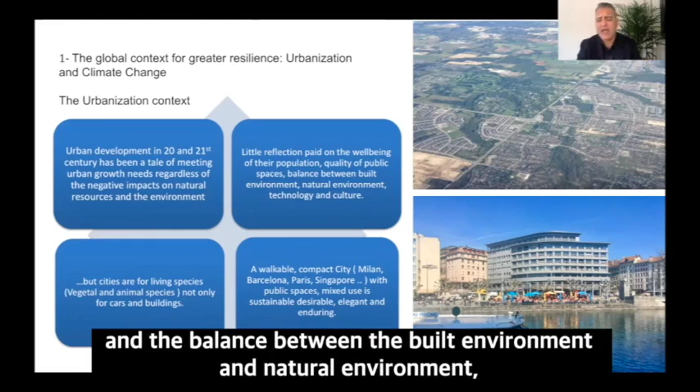There has been little reflection paid on the well-being of the population, quality of urban space, which is public spaces, and the balance between the built environment and natural environment, between the implementation of new technologies and culture, and all those elements that come together in urban life. But there's also an understanding increasingly that cities are for vegetal and animal species, for living species, including human beings, not only for cars and buildings and the built environment.

What we see increasingly labeled as desirable by the population is a walkable city. We have those compact walkable cities in Europe, but also elsewhere in Asia. Milan, Barcelona, Paris, to some degree Singapore are very good examples of those cities where people can move around, can use public spaces, where there is urban mixity, mixed use between retail, housing, and business, that makes cities obviously more sustainable, desirable, elegant, and enduring, with an environment that is prone for human and living species development.

The second part of this context is obviously climate change. There is an overwhelming consensus that climate change is a reality across the planet. All cities are impacted by climate change. And if we really want to open up climate change in terms of its impact, it's extreme weather events. So it's flooding, drought, heat and cold wave periods, hurricanes, tornadoes, typhoons in greater frequency, irregular in terms of their seasonality, and increasing in both intensity and frequency, obviously as a result of climate change.

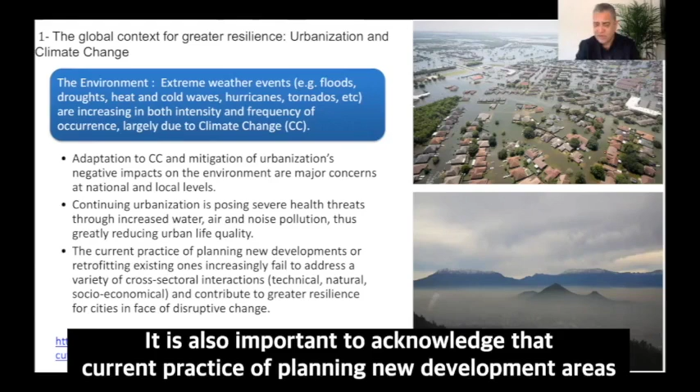It is also important to acknowledge that the current practice of planning, be it for new developments, new developed areas, or retrofitting the existing ones, has been increasingly failing to address a great number of cross-sectoral interactions that need to be addressed to reduce these externalities, to improve the living environment for the population, and to develop greater resilience.

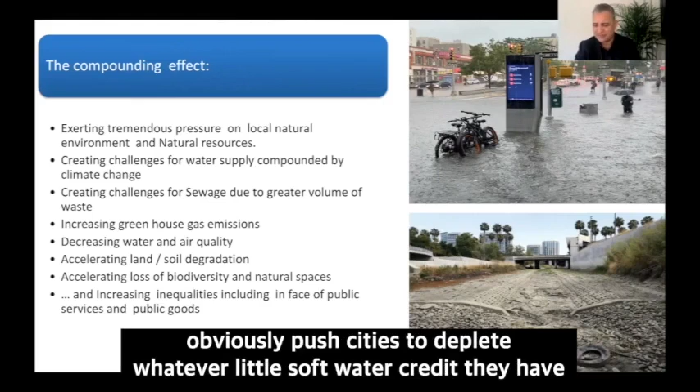The compounding effect of urbanization and climate change cannot be more staggering. Obviously, we have tremendous pressure on local natural environment and natural resources. The lower picture shows you an episode of drought, where extensive droughts across different parts of the world obviously push cities to deplete whatever little soft water credit they have at their disposal. And this obviously puts a huge pressure on the renewal of these resources.

The compounding element is that climate change and urbanization are obviously affecting the water supply, as well as other natural resources that also participate in the food system. Soil, for example, is a very good illustration of how our most fundamental element for our survival, which is water, but also the food system, can be negatively impacted by the compounding effect of urbanization and climate change.

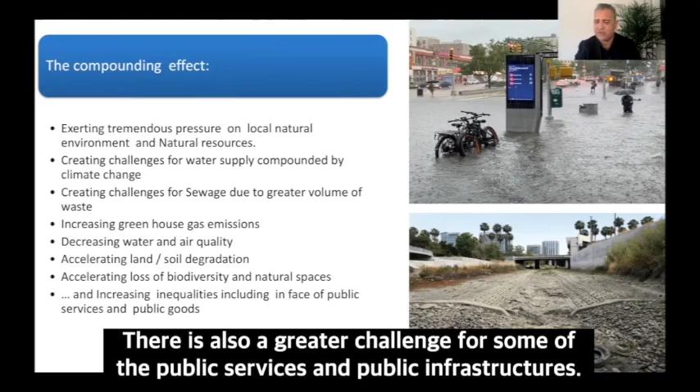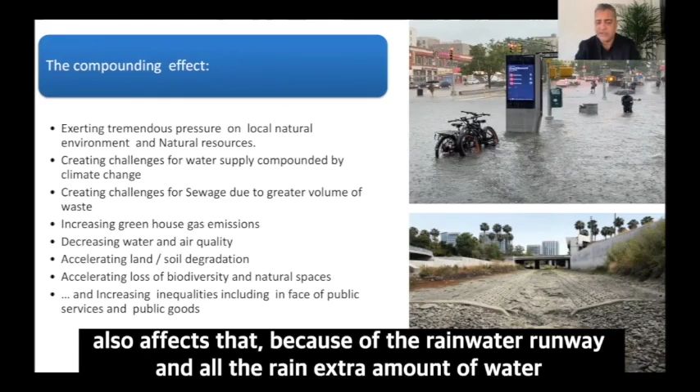There are also greater challenges for some of the public services and public infrastructures. Water and waste treatment, the sewage system are heavily challenged due to greater volume of waste and irregularity of waste. And some of the heavy rains, unseasonal rains that our cities have been witnessing also affect that because of the rainwater runoff and all the extra amount of water that needs to be processed and overwhelms the treatment facilities.

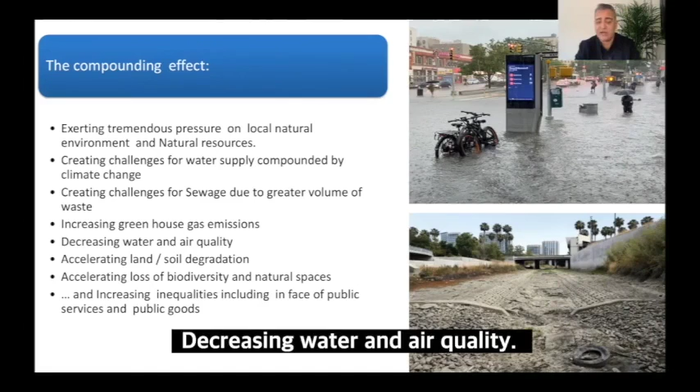Greater increase in greenhouse emissions is also part of that vicious circle or compounding effect of urbanization, which is accompanied by a greater number of cars and transportation based on fossil fuel, and therefore greater greenhouse gas emissions. Decreasing water and air quality. It's not only about quantity, quality is also very important as a result of this convergence of urbanization and climate change.

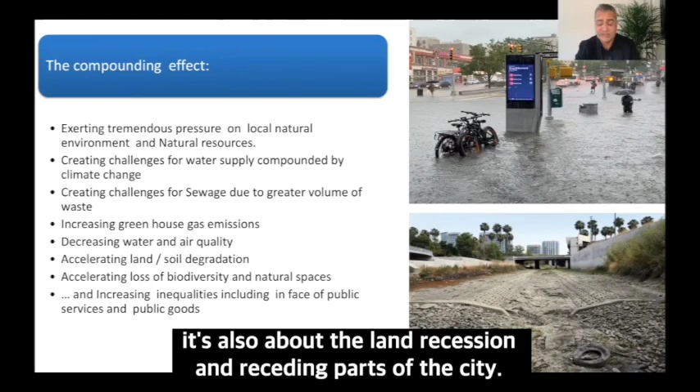As well as I was saying earlier, acceleration of land and soil degradation, which clearly affects the livelihood of people through the food system, but not only, it's also about the land recession and receding parts of the cities. You see these big holes that open up, and this is because of the soil degradation also.

There's also obviously acceleration of biodiversity loss. The more we build, the more we concrete, the more we use asphalt, we push natural species, vegetal and animal, further outside the cities, and biodiversity loss has reached unparalleled levels across cities in the world, and also the natural spaces that go hand in hand with the biodiversity loss.

And obviously, as a result of all this, we also have the social dimension, which is greater inequalities in face of public services and public goods that are more and more needed. It's not only about the supply of water and electricity, it's about all the elements that we as one single community, urban community, need to have equal access to.

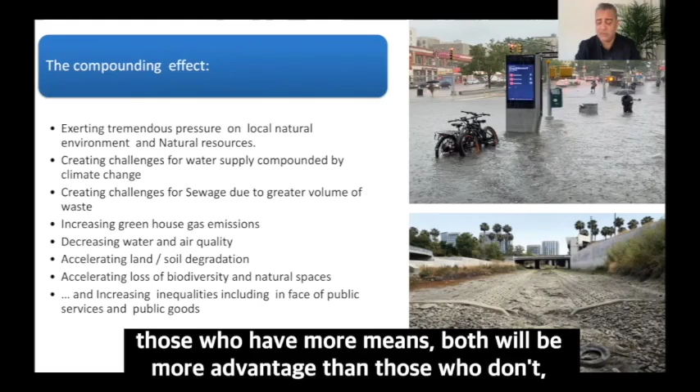Well, in times of scarcity, those who have more means will be more advantaged than those who don't, especially in situations where elements of public good and state interventions are less abundant. This brings us to what I wanted to show you.

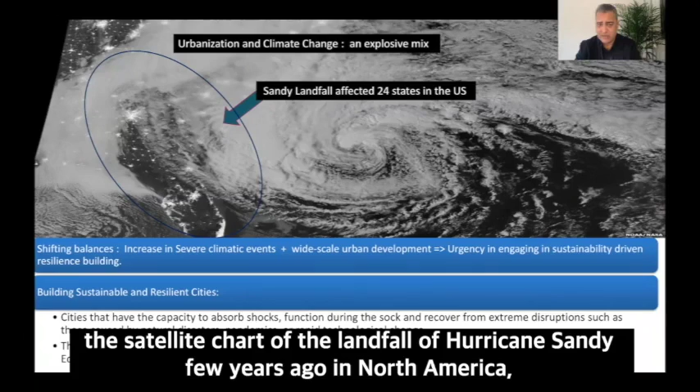It's a satellite shot of the landfall of Hurricane Sandy a few years ago in North America and how it affected a huge area that has been urbanized, one of the most urbanized areas in the US, the Eastern Seaboard, which basically covers 24 states in the US. And here you see the catastrophic kind of conjuncture between urbanization and climate change.

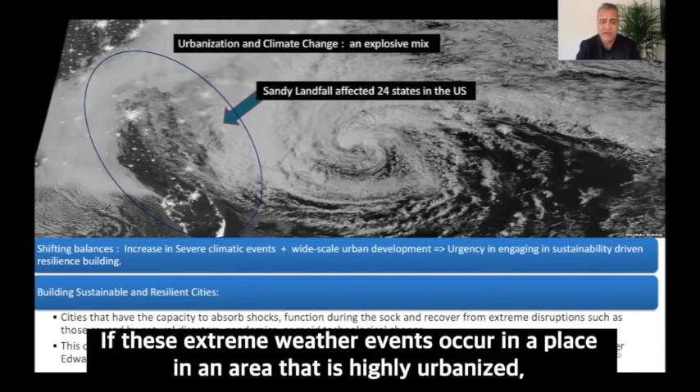If these extreme weather events occur in an area that is highly urbanized, you can imagine that casualties and all sorts of losses, economy, but also human life, are at high risk. So the increase in severe climate events plus wide-scale urban development imposes on us an urgent intervention, not only to drive sustainability agendas of the cities, but also to build resilience.

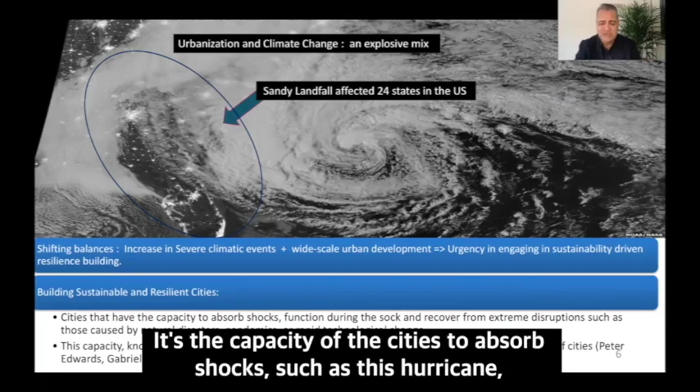What does resilience mean in this perspective? A very simple definition: it's the capacity of the cities to absorb shocks, such as this hurricane, function during the shocks, and recover from extreme disruption, such as those caused by natural disaster, pandemic, or rapid technological change, while developing better cities, better prepared cities, and systems that can improve as they go.

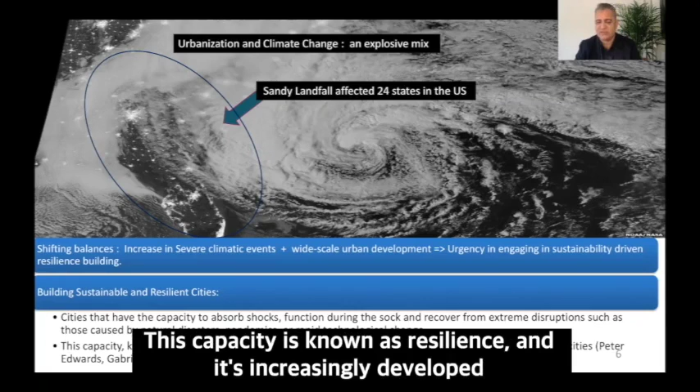This capacity is known as resilience, and it's increasingly developed as part of the overall sustainability agendas of cities. And people like Peter Edwards and Gabriela Wickler in their piece in 2020 really emphasized those elements very nicely. It's also important to understand that all we are living today is a result of how we built our cities. The cities that we designed, we are living today, are the result of the way we looked at them in the past.

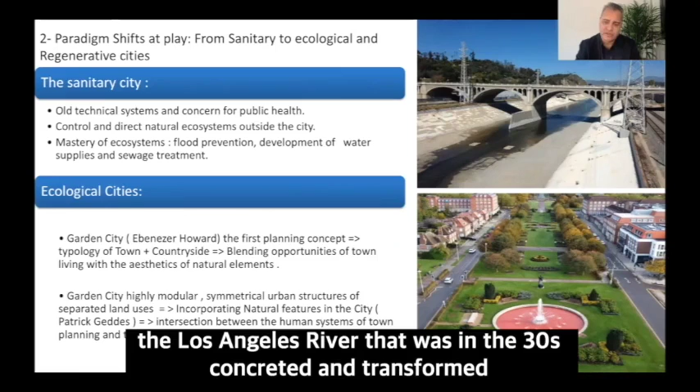Starting from the sanitary cities. Sanitary cities were cities where old technical systems and concern were for public health. You see on the upper photo the Los Angeles River that was concreted in the 30s and transformed literally as a result of flooding situations, and to minimize flooding, it was transformed into a channel. And what you see today is void of any natural life.

The river has a channel to maximize the flow of rainwater. In a very short amount of time, the rain ends up in the ocean with no contributions to the natural environment. And this is becoming the general rule across the planet. What sanitary city meant at that time is to control and direct natural ecosystems outside the city. Natural ecosystems were considered as the threat.

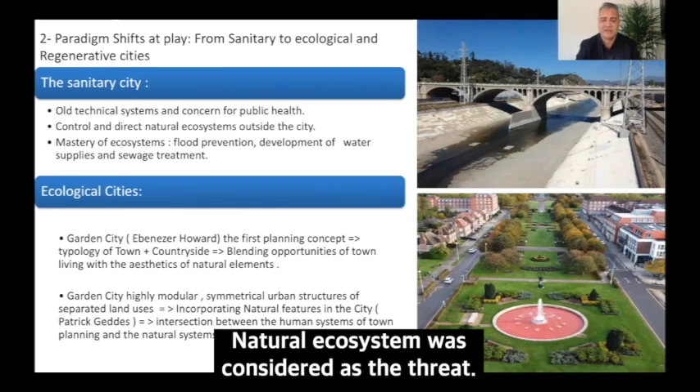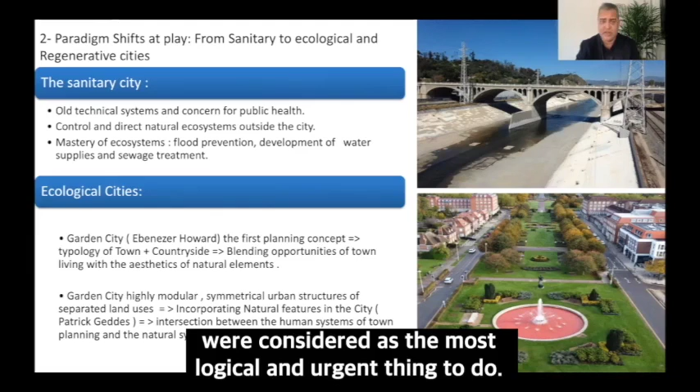Think of European cities or Asian cities in the late 19th century, early 20th century. Waterborne diseases were associated, for example, with rivers and so on. So you can imagine that pushing these natural elements outside cities was considered the most logical and urgent thing to do. So the mastery of ecosystems at that time was about flood prevention, development of water supplies, and sewage treatment. This brings us to a second reading, understanding the cities connected more with nature.

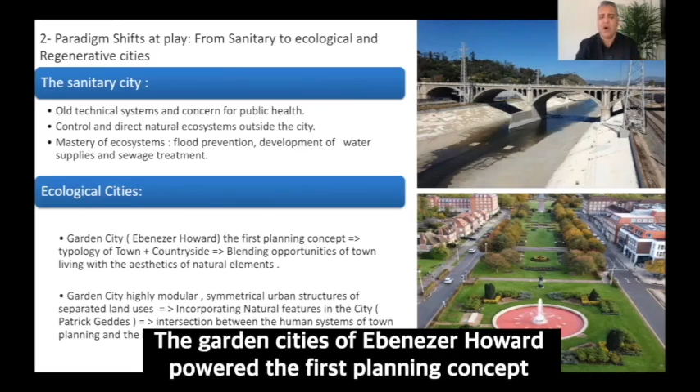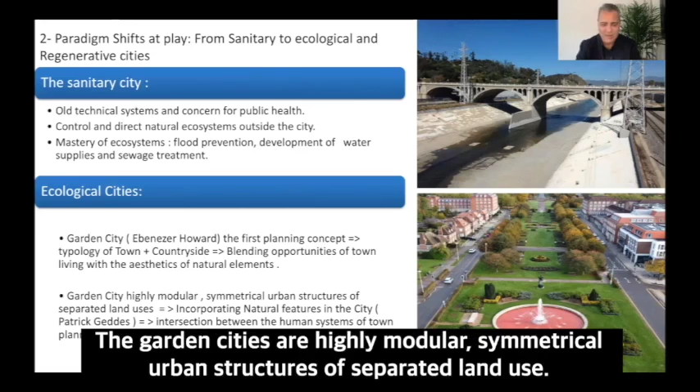That was the ecological cities, the garden cities of Ebenezer Howard, the first planning concept that truly brought town and countryside together, blending opportunities of town living with the aesthetics and some of the positive elements of nature. So it was trying to connect urban living with countryside living. And the garden cities were highly modular, symmetrical urban structures of separated land use. So you had on one side housing, then you also had retail, business, and you name it.

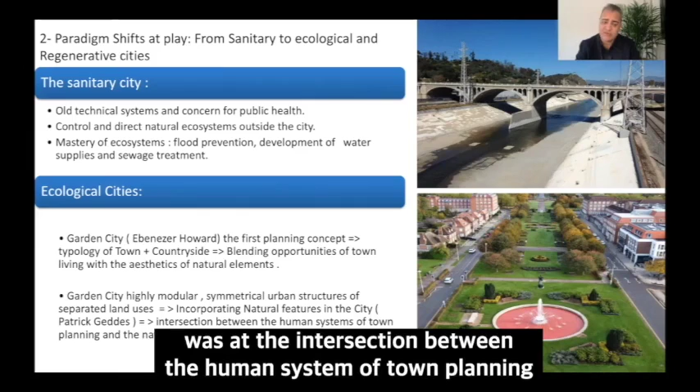Incorporating natural features in the cities, something that Patrick Geddes, for example, did, was at the intersection between the human system of town planning and the natural system of ecology and geomorphology. This understanding of the connection between built and natural environment didn't last long because of the scale of urbanization.

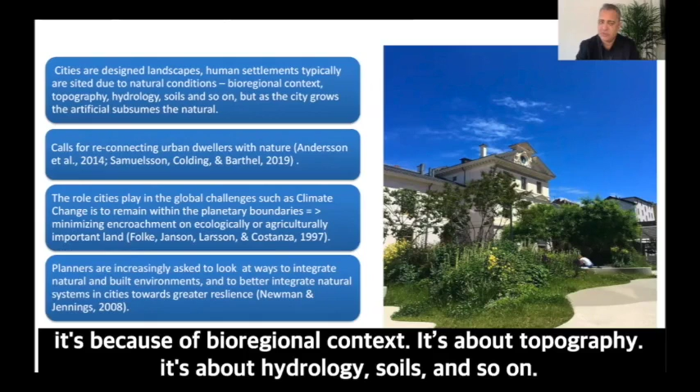Cities are designed landscapes, human settlements typically sited and developed due to natural conditions. If we have a city by a river or on the footsteps of a mountain, it's because of the bioregional context. It's about the topography, it's about hydrology, soils, and so on.

But as the cities have been growing, this artificial subsumes the natural. We build higher, more in elevation. There is a need to go further beyond the hydric and hydrologic basin and watersheds. And obviously, artificial takes over on natural.

And there has been many calls for reconnection of cities and urban dwellers with nature. Andersson et al. in 2014, Samuelsson, Colding, and Barthel in 2019 were among those who were very vocal about that.

And there is another element that we need to understand: the role that cities play in global challenges such as climate change is at the forefront of our understanding of this interaction between cities and their natural environment. We need to make sure that cities can reduce and will reduce their negative impact on their environment, on their ecological footprint, but also reduce some of the other elements that contribute to the negative externalities and overall planetary boundaries that we have established.

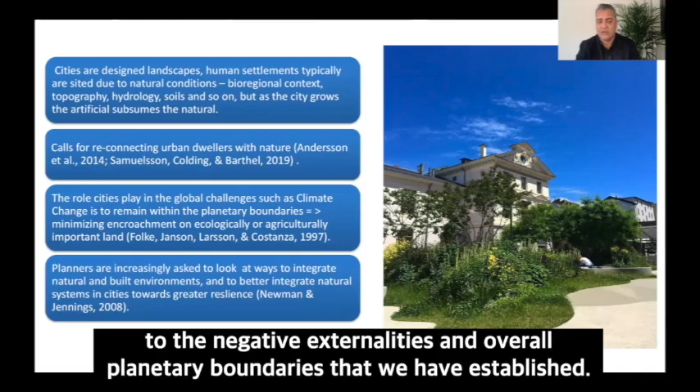And authors like Folke, Janson, Larsson, and Costanza in 1997 really emphasized that element.

So us planners, urban planners, city planners, are increasingly encouraged to ask ways to integrate natural and built environments, and to better integrate natural systems in cities to reduce negative externalities and negative impacts on the natural environment, but also to develop the resilience of cities, to develop this capacity to resist the shocks, to absorb the shocks, to resist the shocks, and to function during the shocks, and to improve the models that we have.

Newman and Jennings are two authors that really emphasize this. The photo that I have here is an illustration of a parklet in Geneva, Switzerland, where a school courtyard was transformed into this neighborhood public space, where greenery is also part of the block, and obviously creates an area which is permeable to water, to rain, can infiltrate rain into the water, and break the monolithic concrete or asphalt or impermeabilized area that we had.

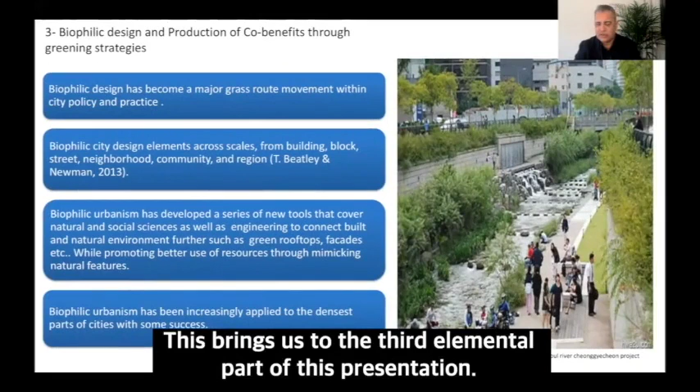This brings us to the third part of this presentation, on biophilic design and production of co-benefits through greening strategies. Biophilic design has become a major grassroots and bottom-up movement within city policy and practice. There is more and more demand from the population and citizens to bring nature into the city and to design the city in a way that promotes the role of nature beyond aesthetics.

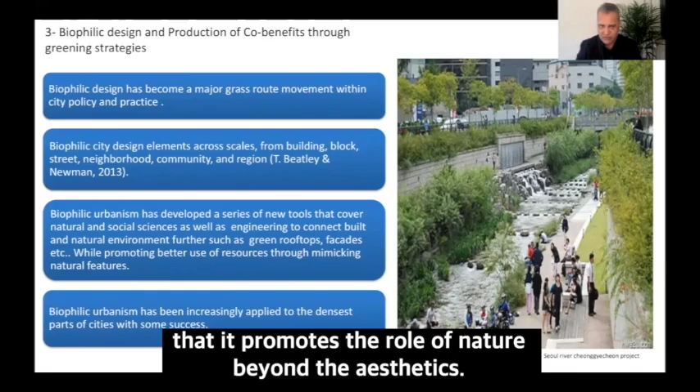So biophilic city design elements across scales, from building, block, streets, neighborhoods, community, and region, have been at the heart of research. Beatley and Newman wrote about these elements, but it's also important for us to understand that biophilic design and urbanism has developed a series of new tools that cover natural and social sciences as well as engineering to connect the built and natural environment, such as bringing green rooftops, facades, quarries, and so on, while promoting better use of resources through mimicking natural features.

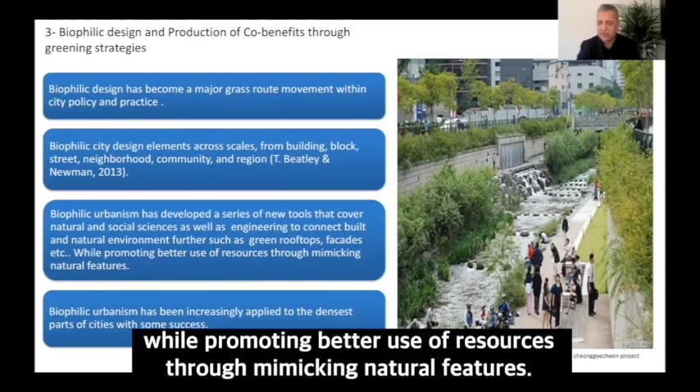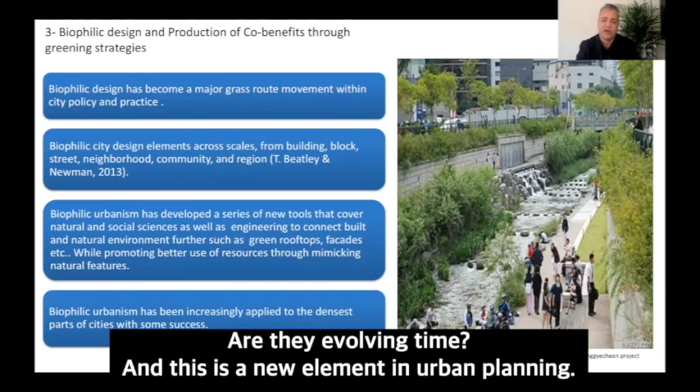Human beings, individuals, a population need to play an important role in this, not only in the conception and definition of problems, but also in the design of strategies, plans and projects, and in their use and upkeep, and how they evolve over time. This is a new element in urban planning.

Biophilic urbanism has increasingly been applied to the densest parts of cities. The image here, which most of you know, is the Cheonggyecheon project in Seoul, which many cities are trying to mimic as a very successful example of bringing nature back into the city for the benefit of the greater population.

It is based on the understanding that urban vegetation provides many ecosystem benefits and services for individuals, the community, and nature. It contributes to the mental well-being of the population, reduces the heat island effect, and offers places to rest, relax, and recharge. It is the basis of the quality of our landscapes, forests, and countryside, but also our neighborhoods and streets. The use of indigenous species allows distinct flora and fauna to find habitat, and species that were pushed outside the city come back.

I want you to follow this link that shows how, by bringing back nature into the city through urban vegetation, soil becomes very central to this new understanding of cities. Soil plays an important role in our well-being and not only our livelihood through the food system, but also in its capacity to regenerate the city, develop vegetation, contribute to greener areas, and have positive environmental impacts such as carbon capture, acting as a sink for some emissions.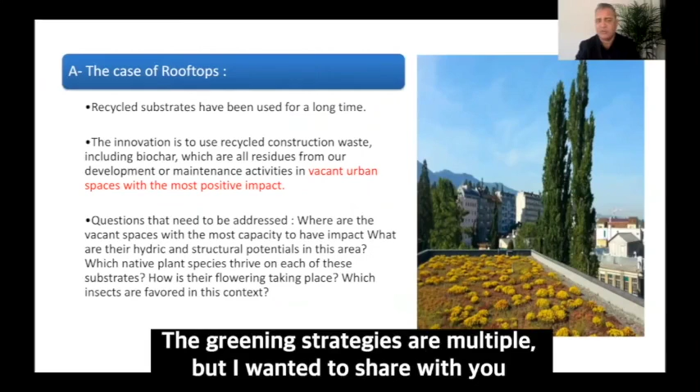Soil is extremely important in this perspective. The greening strategies are multiple, but I wanted to share three of them that I think are the most widely used.

One is the case of rooftops. More and more, we see greening rooftops based on a long tradition of recycled substrates used to develop vegetation. The innovation today is to use recycled construction waste, whatever waste is produced in the city, including biochar, and try to use it to green vacant spots, areas, and spaces across cities.

Some of those spaces are, I would say, low-hanging fruit in terms of realization and greening, such as rooftops. But the questions that need to be addressed toward greening rooftops include: where are the vacant spaces with the most capacity for impact, and what are their hydric and structural potentials in this area?

Which native plant species thrive on each of these substrates? Because our goal is to bring back native plants, not to import new ones or alter the existing natural dynamic. And the last two questions are: how does their flowering take place, and which insects are favored in this context by using this vegetation?

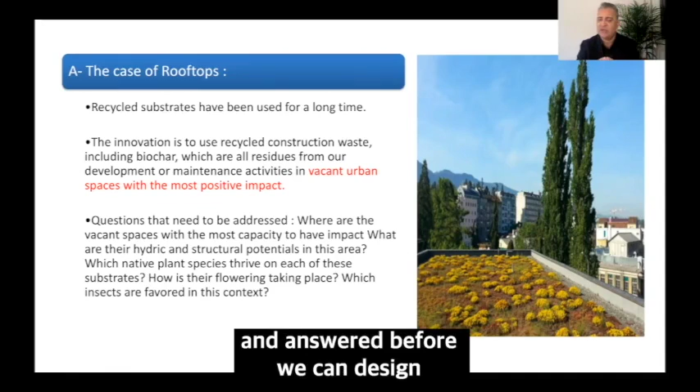So you see that we have a mix of questions that need to be addressed and answered before we can design those projects. This requires different groups of experts from the natural sciences and city planning, but also from the social sciences, to come together with a common understanding of what needs to be done and what the interactions are.

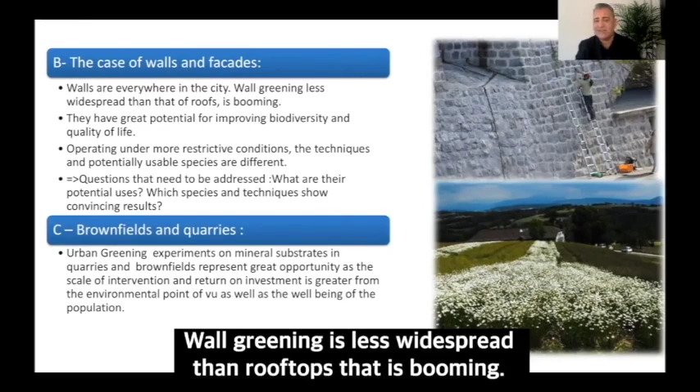The case of walls is different. Greening walls and facades are everywhere in cities, but wall greening is less widespread than rooftop greening, which is booming. Walls have potential for improving biodiversity, quality of life, and the aesthetics of the city, but they operate under more restrictive conditions, and the techniques and potentially usable species are very different.

The questions here to address are: what are the needs and potential uses of these walls? Are they important structural elements of a city, like the old towns with their big old walls, or are they more design elements in cities? Which species and techniques need to be planted to participate in greening the facades and contribute to convincing results and impact?

The third element of greening strategies, which has wide-scale impact because of its size and scope, is brownfields and quarries. Urban greening experiments on mineral substrates in quarries and brownfields represent a great opportunity, as the scale of intervention and return on investment seem to be much greater, both from an environmental point of view and for the well-being of the population.

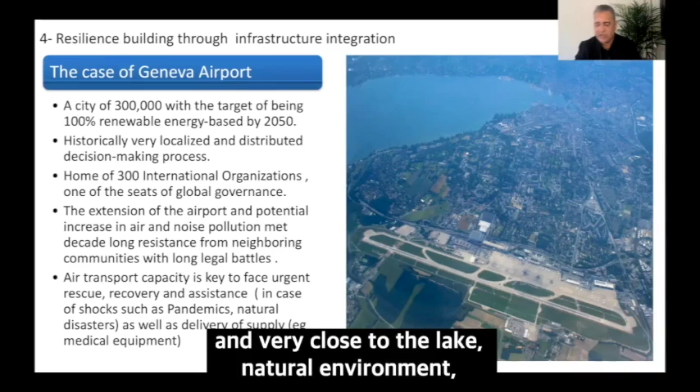So here I want really to go to the core element of resilience building through infrastructure integration. I have a photo, an aerial view of the city of Geneva, where you have an international airport very close to the city center and very close to the lake, natural environment, but it also participates heavily in urban economy and the accessibility of the city.

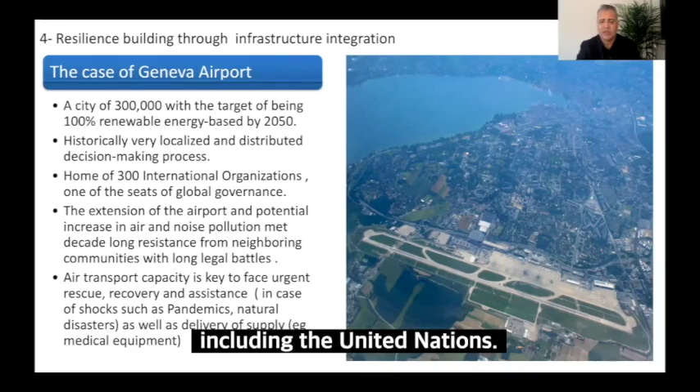It's a small or mid-sized city of 300,000 with a goal to reach 100% renewable energy base in 2050. Historically, very localized and distributed decision-making process, home of 300 international organizations, one of the seats of global governance, including the United Nations. In this context, the extension of the airport, which was under capacity, was very important, and the potential increase in air and noise pollution met decade-long resistance from neighboring communities with long legal battles.

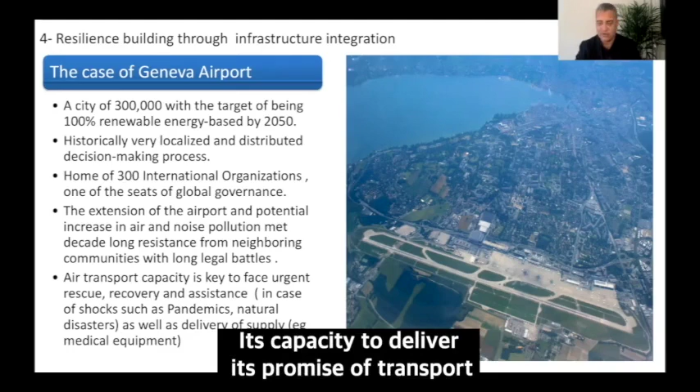Air transport capacity is key, like anywhere else here in Geneva, to face urgent rescue, recovery, and assistance in case of shocks such as pandemics or natural disaster, as well as delivery of supply. So how do we go with the needed extension of the airport, its capacity to deliver its promise of transport for all sorts of purposes, but also being a place of urgent rescue, recovery, and assistance?

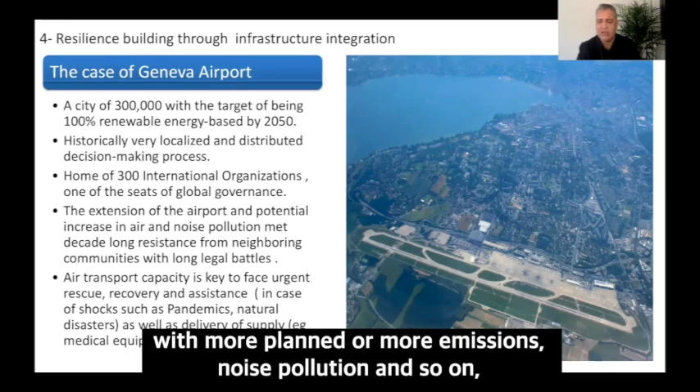The project is called Genilac, a circular heat-sinking system based on lake water at 45 meters, which maintains a stable 7-degree temperature throughout the year. You can imagine that in summertime this has an obvious cooling impact and capacity, and in wintertime, with the heat pumps, it reduces the consumption of energy.

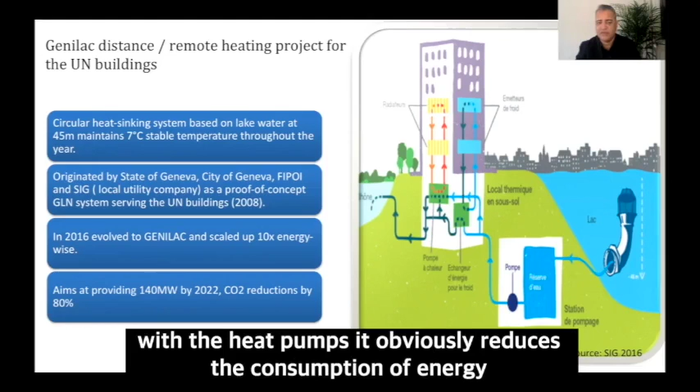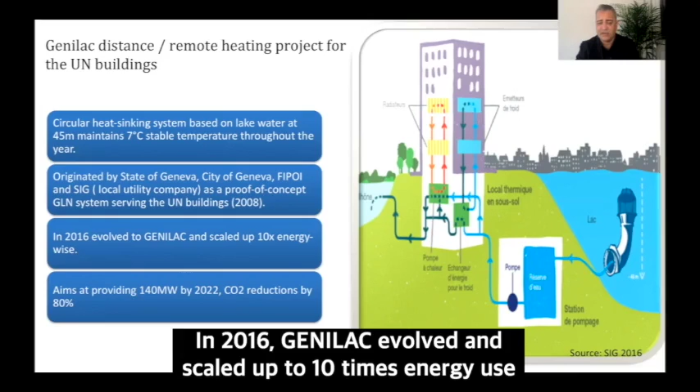It was originated by the state of Geneva, the City of Geneva, and a few foundations, designed to improve the cooling and heating capacity of the UN buildings. In 2016, Genilac evolved and scaled up to 10 times its energy use, and aims at providing 140 megawatts by 2022 and CO2 reductions of 80%.

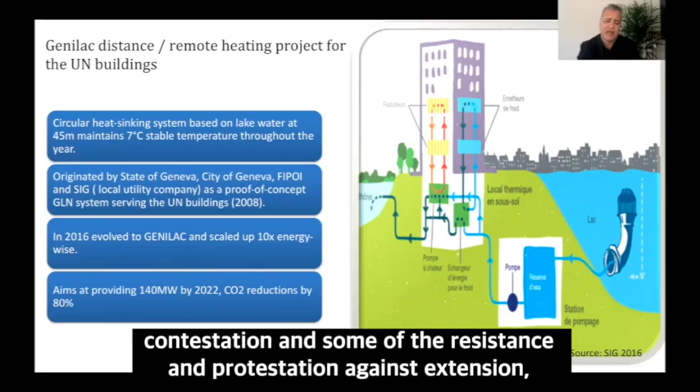This project enabled the airport to move ahead and address some of the contestation, resistance, and protestation against its expansion, and to come up with a new agenda of expansion using this technique. And obviously, this was a success story.

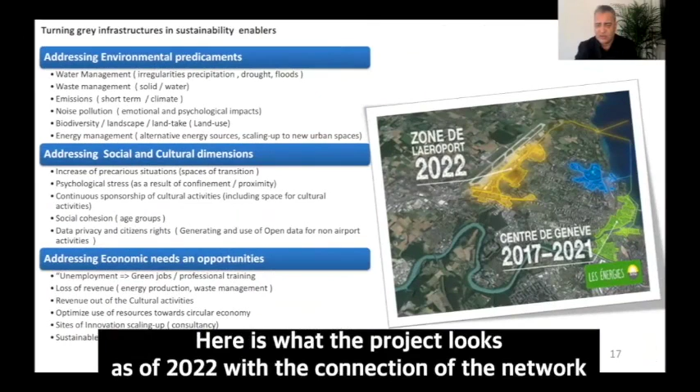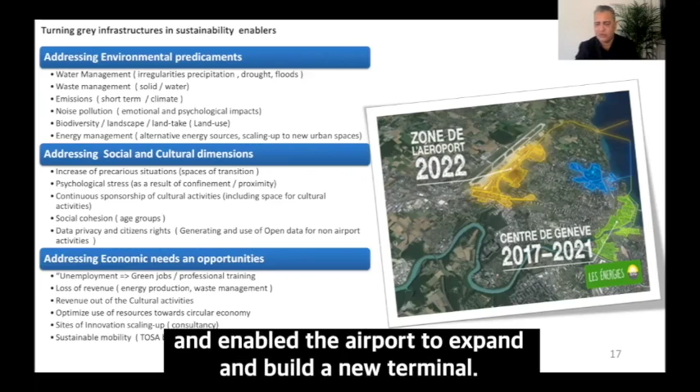Here is what the project looks like as of 2022, with the connection of the SIG network to the airport, as well as, in blue, the UN neighborhood, and in green, the banking neighborhood in Geneva. So this network expanded beyond what it was designed to be, and enabled the airport to expand and build a new terminal. It addresses environmental predicaments, social and cultural dimensions of an infrastructure, and economic needs and opportunities.

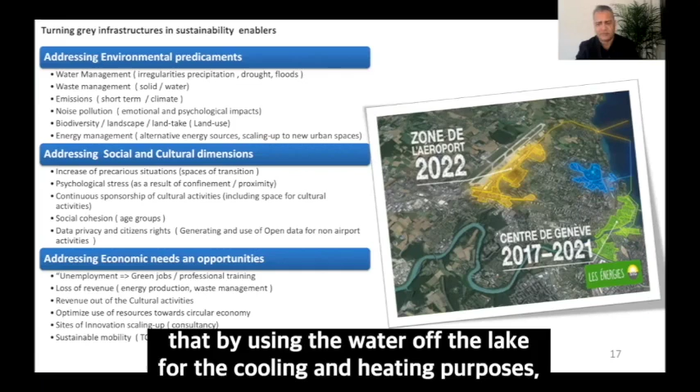The first one, environmental predicaments, is about water management, waste management, emissions, noise pollution, biodiversity, and energy management. You can imagine, without getting into the details, that by using the lake water for cooling and heating purposes, you reduce carbon emissions and reduce the fossil fuel use needed for an expansion and a new terminal.

But you also bring in new elements from the social and cultural dimension: increase of precarious situations in spaces of transition, psychological stress associated with some elements of urban growth, continuous sponsorship of cultural activities, including spaces for cultural activities. As a result of this new understanding of the role of transport and this infrastructure, it creates social cohesion instead of social polarization across the city, where you have different points of view that are always in conflict, but also social cohesion across age groups.

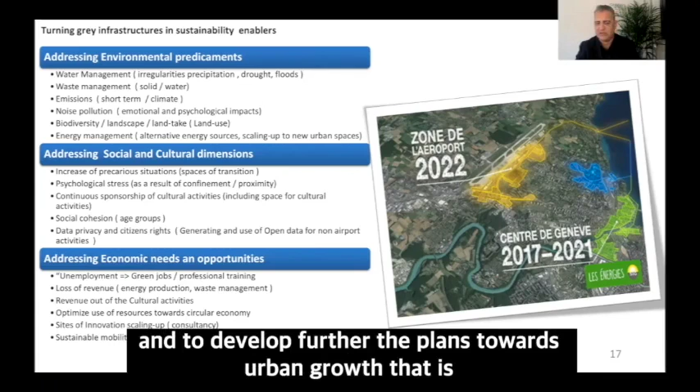And obviously, the elements of data privacy and citizens' rights are also brought into this, with the communication that has been done around the project—the data is available, there's nothing to hide. This also creates a positive environment with the population to discuss and further develop plans towards urban growth that is in harmony with the expectations of the population, but also with the requirements to reduce the negative impact of these infrastructures on their natural environment.

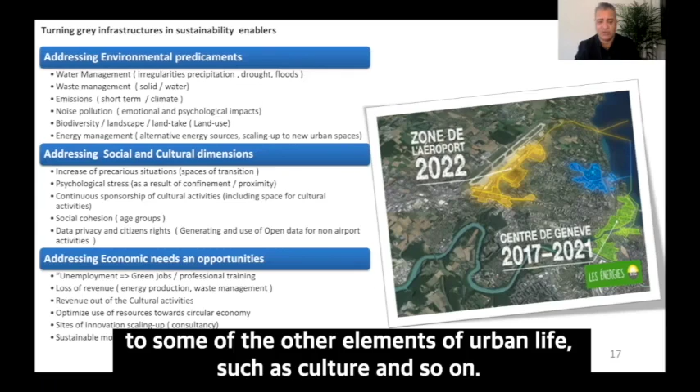Obviously, if the airport expands, it can also continue participating in urban economy, creating new jobs or extending existing ones, preventing loss of revenue, and dedicating more income to other elements of urban life, such as culture and so on. And based on this success story, this can also become a domino effect and become a role model for the city to promote in the future.

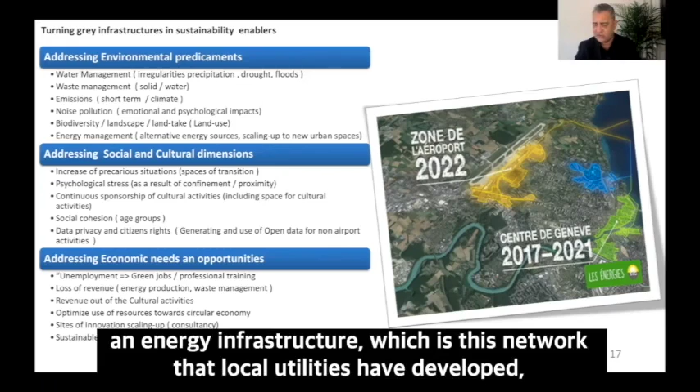So you see that, all in all, it's been a success story just by integrating an energy infrastructure—this network that the local utility has developed—with the transport network that the airport represents.

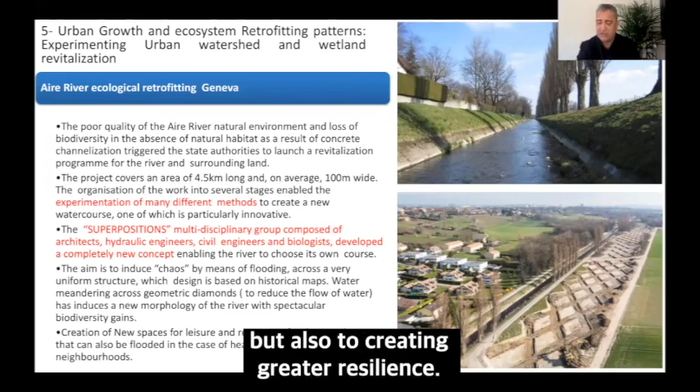The fifth part of this presentation is about urban growth and ecosystem retrofitting, and how by revitalizing watersheds, wetlands, and rivers, we can truly contribute to the sustainability agenda of the city, but also to creating greater resilience.

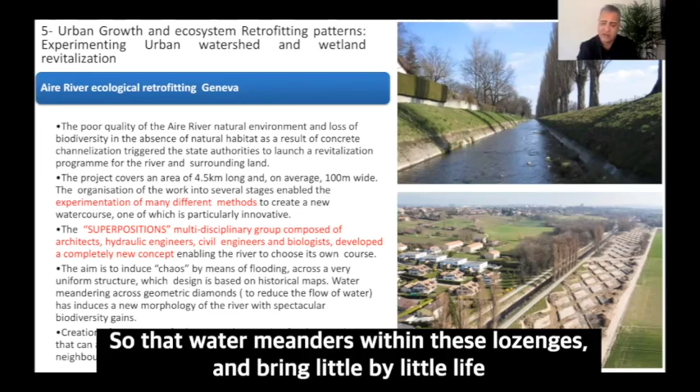I have an example of a river in Geneva, Switzerland, the Aire River, and its ecological retrofitting project. The upper photo shows the river turned into a channel, like the Los Angeles River, at a much smaller scale, but nevertheless the same model: concreted and void to a great degree of natural life. The lower picture shows the retrofitting project, the recreation of a riverbed next to the channel with a diamond-shape design to reduce the flow of water so that it meanders within these lozenges, bringing back life with different animal and vegetal species to this newly retrofitted river.

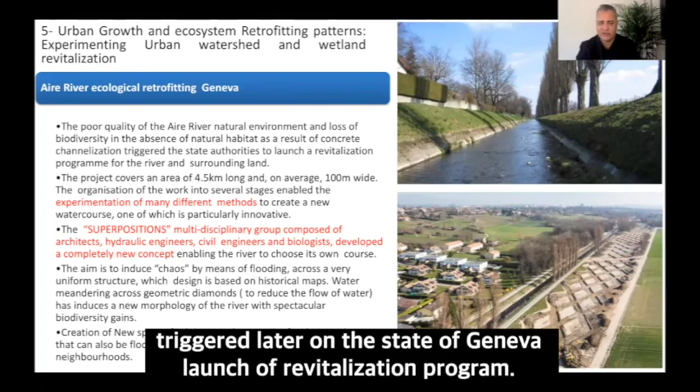It all started with the poor quality of the river's natural environment and the loss of biodiversity in the absence of natural habitat as a result of channelization, which triggered the state of Geneva's launch of a revitalization program. The project covers an area 4.5 kilometers long and 100 meters wide. The work was organized into different stages enabling experimentation of many methods. We need to understand that in these situations, cities are becoming urban labs, living labs, where you experiment with elements and come up with a model adapted to the local context.

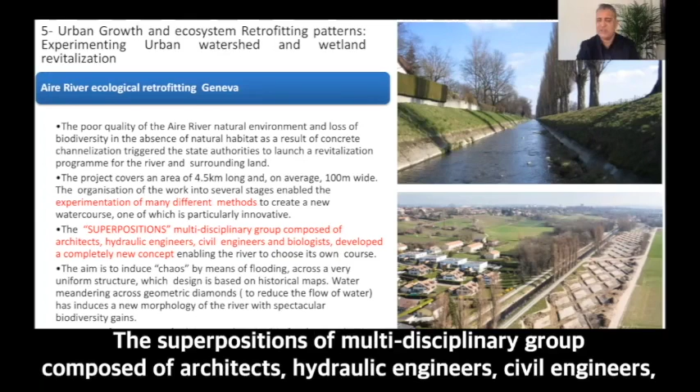A multidisciplinary group composed of architects, hydraulic engineers, civil engineers, and biologists developed a completely new concept, enabling the river to choose its own course. Again, these diamond-shaped design blocks show how these different experts came together with a new mindset, moving together toward a new understanding of the intersection between the built environment and the natural environment.

Interestingly, as you can see in the lower photo, this river lies between an agricultural area and a residential area. So it also needs to be the interface between residential and agricultural or natural areas, both needed for the livelihood and well-being of the population.

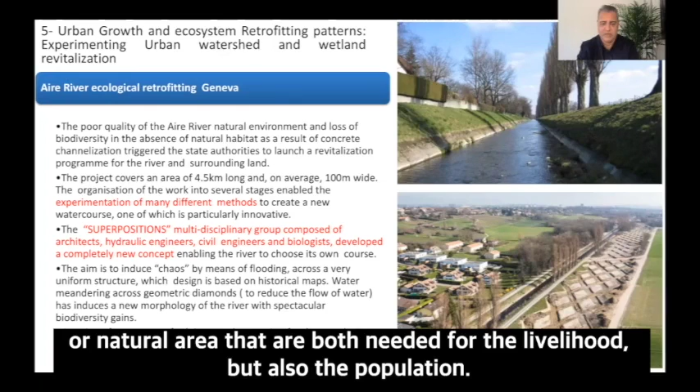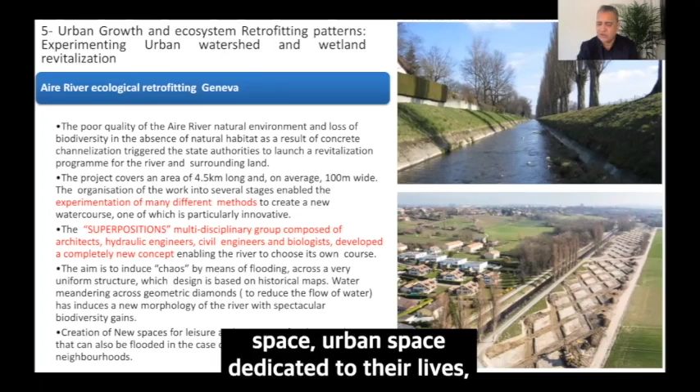The important aspect here is to create a new space, not only for the river to revive, but also for people's recreation, for the population to see this as an urban space dedicated to their lives, so they take ownership of it. This area is also floodable, meaning that in times of heavy rain it can flood and prevent flooding in urban areas downstream. This is one of the key features of the project.

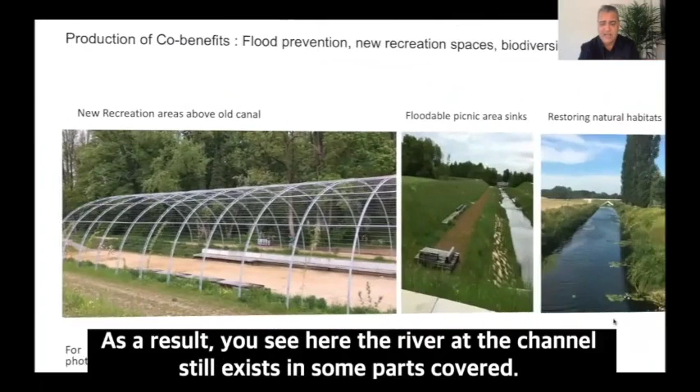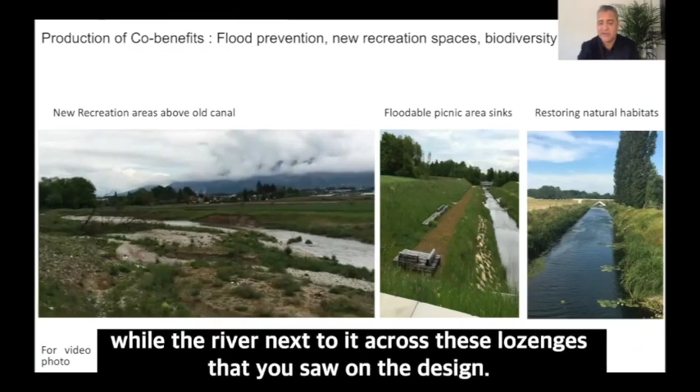As a result, you see here the river, the channel still exists. In some parts it's covered, and as you can see, the covered part of the channel has become a place the population has taken ownership of—these are picnic areas. People can do sports and use these areas on top of the channel, while the river meanders next to it through the lozenges you saw in the design.

Interestingly, you can also see that this whole area in the center photo can be flooded in times of heavy rain, preventing further flooding downstream. And obviously, what you see in the third photo is that nature is back, with vegetation, amphibians, birds, and insects recreating a natural environment that was lost.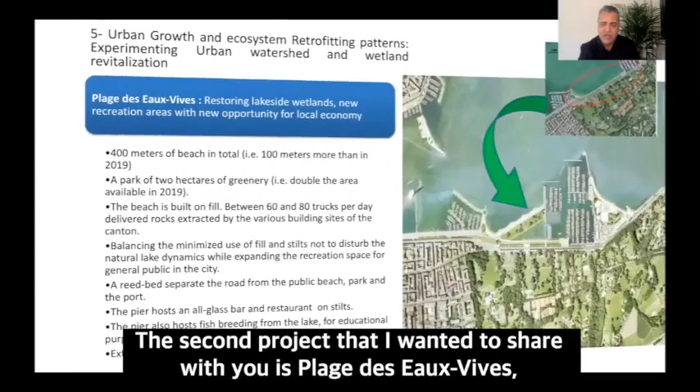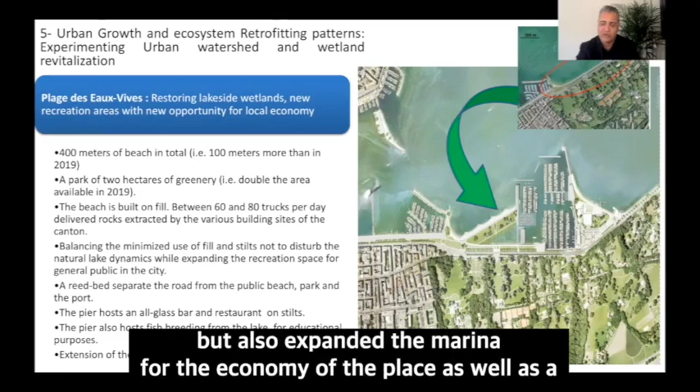The second project I wanted to share is named the Plage des Eaux-Vives, which is basically restoring a lakeside wetland, creating new recreation areas, but also keeping in mind the importance of the local economy. Here you see the aerial view before and after. Before, you had a concreted, built-up lakeshore; in the lower, bigger photo, you see this area has been further developed to host a wetland, beaches for the population to enjoy the lake, but also an expanded marina for the economy of the place, as well as a fishery for educational purposes.

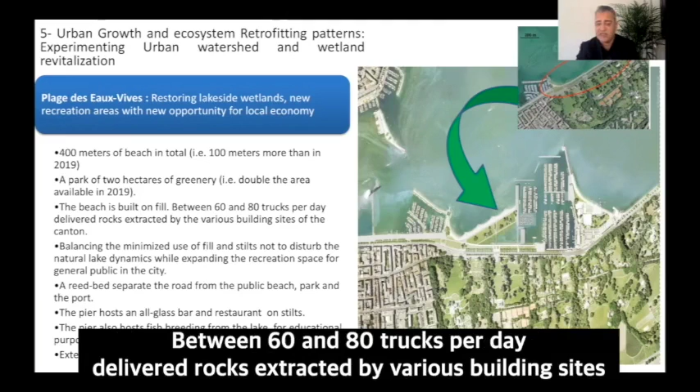It's 400 meters of beach in total, with a park of 2 hectares of greenery. The beach is important to understand—it's built on fill. Between 60 and 80 trucks per day deliver material extracted from various building sites of the canton.

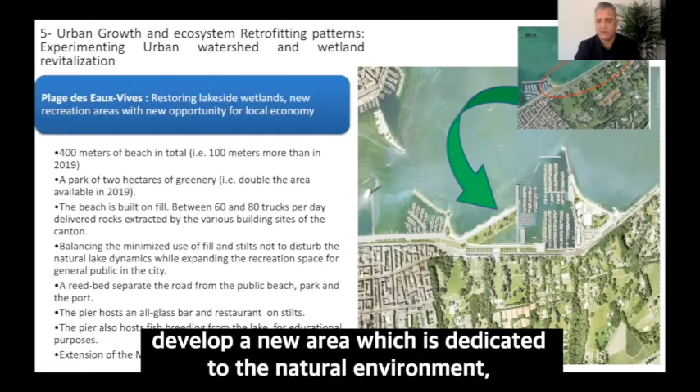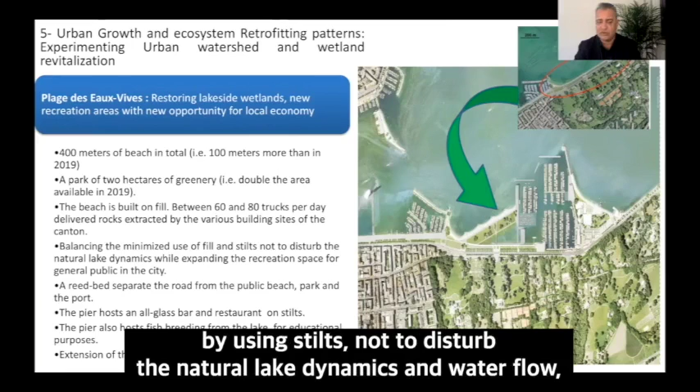Not only are we using urban and architectural waste, but it's also used to develop a new area dedicated to the natural environment and leisure space for the population. What was important here was to balance minimized use of fill so you don't encroach on the lake, reducing fill use to the maximum by using stilts, not to disturb the natural lake dynamics and water flow, while expanding recreation space for the general public.

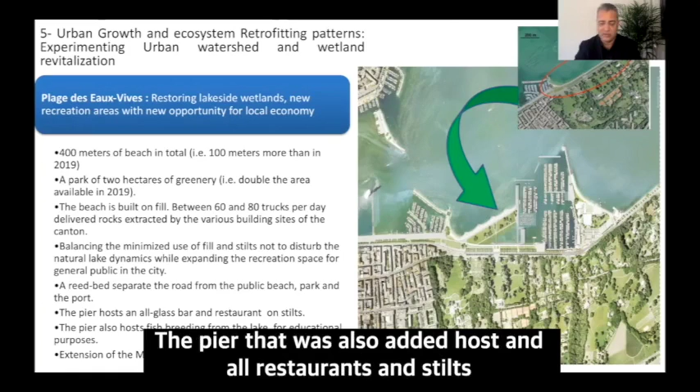The triangle you see on the lower side is a reed bed that separates the street from the public beach, park, and port. The pier that was added hosts an all-glass bar and restaurant on stilts, contributing to the local economy. It also hosts fish breeding from the lake for educational purposes, and the extension of the marina with direct access to the lake further improved the local economy.

It's a new wetland where some amphibians, birds, and vegetation are coming back, with educational opportunities for the population about which species are returning and which species should not be added, such as invasive goldfish and so on.

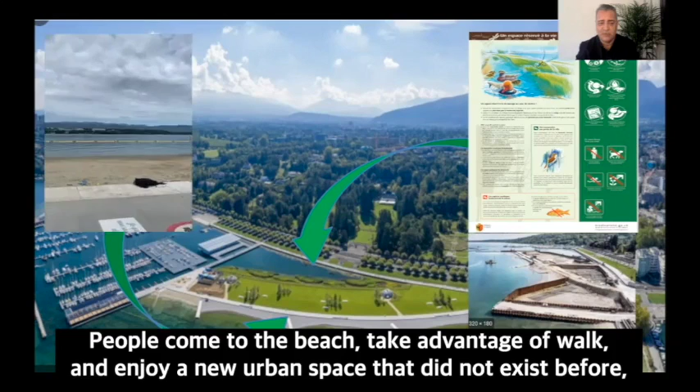This is an area dedicated to nature in the city, a space reserved for wild nature, but also an area dedicated to leisure. People come to the beach, take advantage of the lake, walk, and enjoy a new urban space that did not exist before, while giving nature a chance to come back. This is an important element that these greening strategies play.

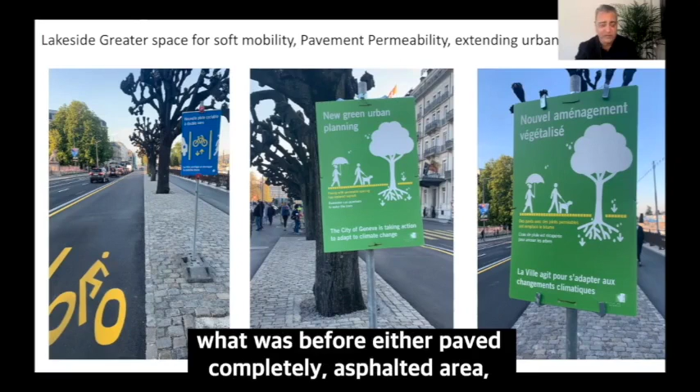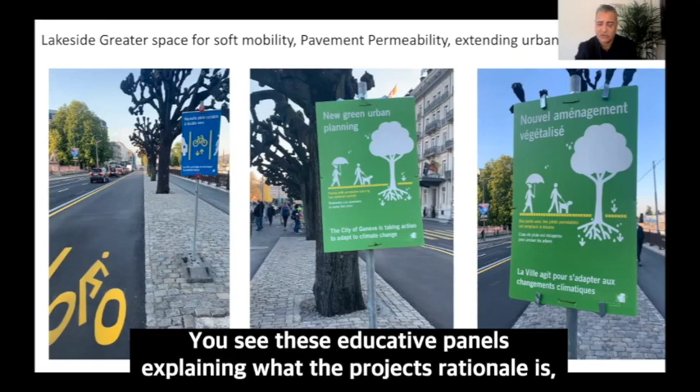These are accompanied by other strategies here in Geneva, such as expanding soft mobility and cycling paths across the city. We reduce the space dedicated to cars and expand corridors dedicated to bikes, while taking advantage of these projects to permeabilize areas that were before completely paved or asphalted, creating new pavements where rainwater can flow down to the aquifer. You see educational panels explaining the project's rationale and how permeabilizing the pavement contributes to biomass and better tree health, expanding biomass across the city.

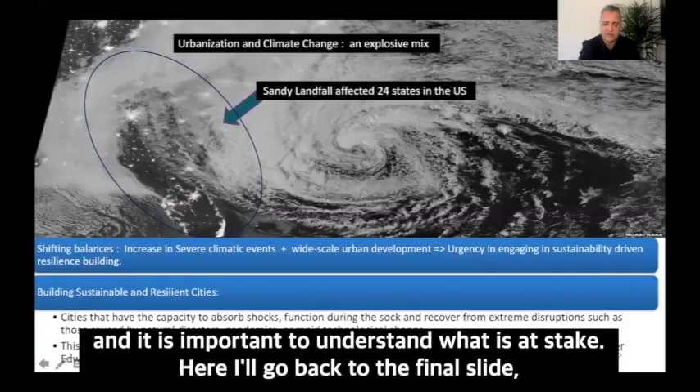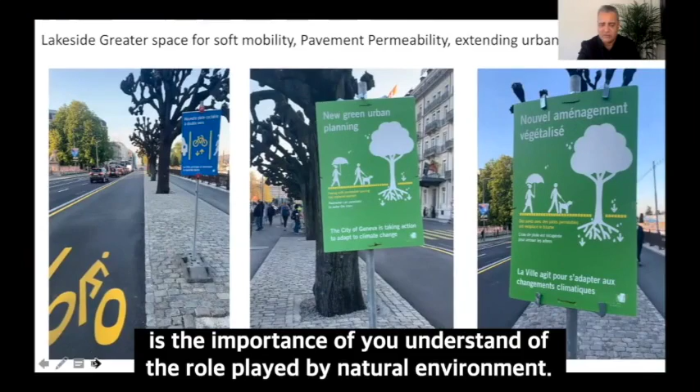Overall, I'd like you to take home these messages. It's important to understand what is at stake here. Going back to the final slide, which I think summarizes the discussion well, is the importance of a new understanding of the role played by the natural environment, and the fact that conceptualizing the city and its infrastructure—including the water urban system we call blue assets, and vegetated areas we call green assets—as a living ecosystem is transforming the divide between cities and environment into an integrated approach of nature-based blue-green solutions.

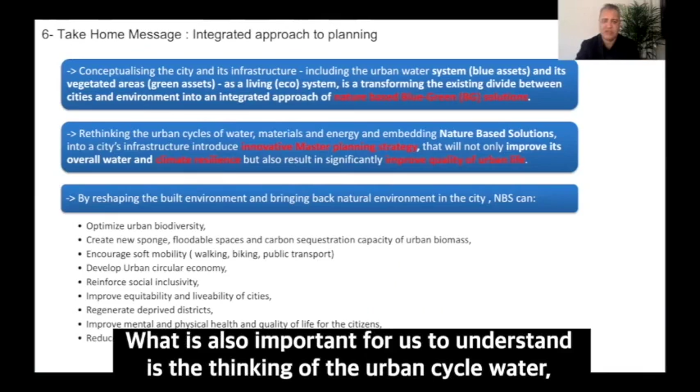Also important is rethinking the urban cycle of water, materials, and energy. Embedding nature-based solutions into city infrastructure introduces innovative master planning strategies that will not only improve overall water and climate resilience, but also significantly improve quality of urban life for the population.

By reshaping the built environment and bringing nature back into the city, nature-based solutions can optimize urban biodiversity, create new sponge floodable spaces and carbon sequestration capacity for urban biomass, encourage soft mobility—walking, biking, public transport—develop the urban circular economy, reinforce social inclusivity, improve equitability and livability of cities, regenerate deprived districts, and improve mental and physical health and quality of life for citizens, while reducing urban violence and social tensions.